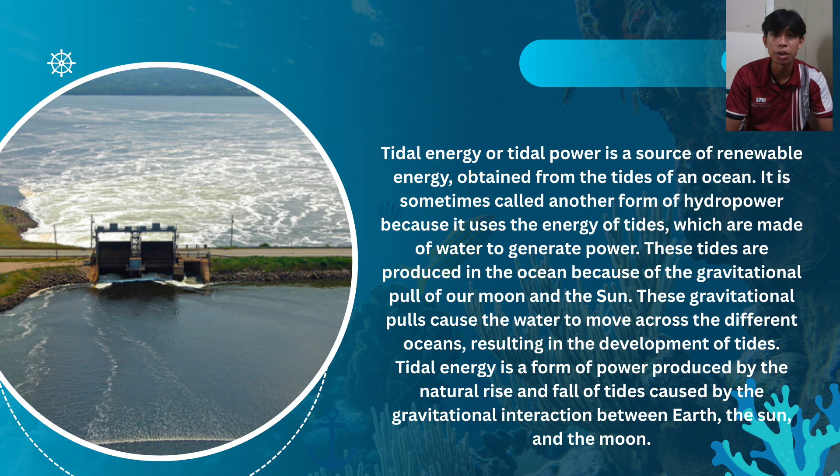to generate power. These tides are produced in the ocean because of the gravitational pull of the moon and the sun. These gravitational pulls cause the water to move across the different oceans, resulting in the development of tides. Tidal energy is a form of power produced by the natural rise and fall of the tides caused by the gravitational interaction between Earth and the Sun and the Moon.

Tidal range. The difference between high tide and low tide is called tidal range. High and low tides refers to the regular rise and fall of the ocean waters. High tide is when water covers much of the shore after rising to its highest level. Low tide is when the water moves back to its lowest level, moving away from the shore.

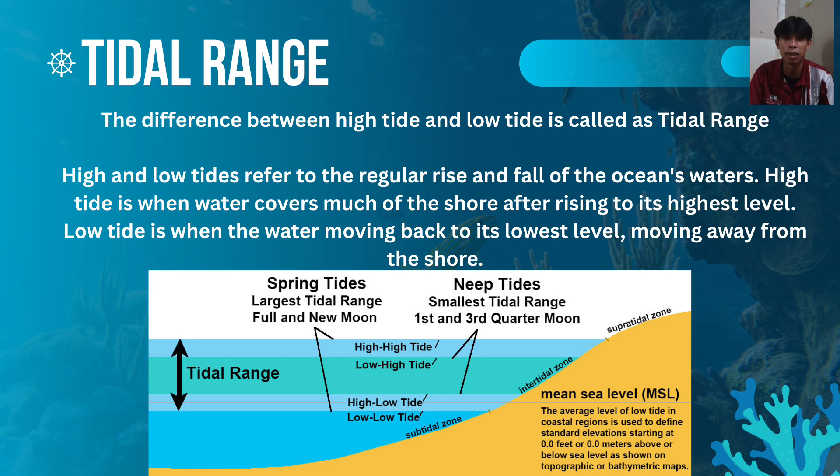For more explanation about spring tide and neap tide, it will be explained in the next slide. Basic principles of tidal power.

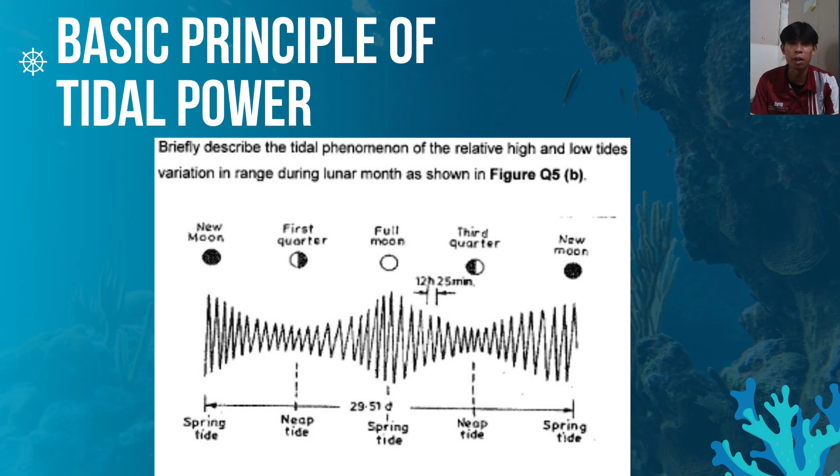Neap tide. A neap tide follows 7 days after a spring tide. Like spring tide, it's connected to the lunar phase and takes place after the first and third quarters of the moon. This is when the moon and the sun are at right angles to each other. The effect of this alignment is that there is less difference between high and low water.

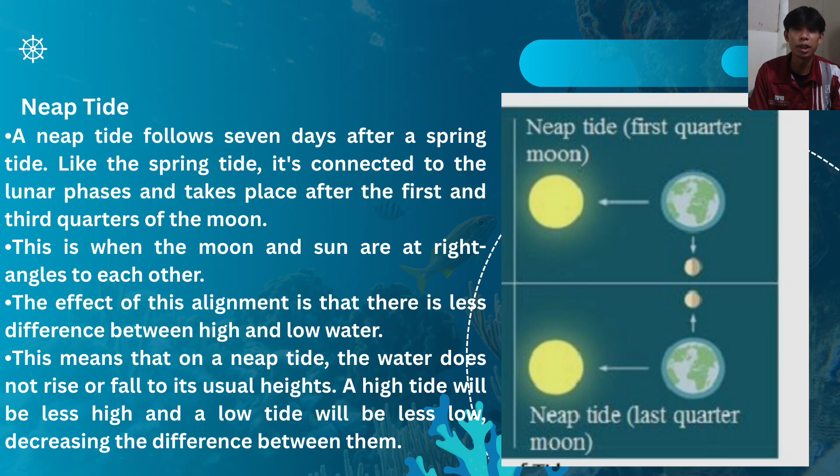This means that on the neap tide, the water does not rise or fall to the usual heights. A high tide will be less high and a low tide will be less low, decreasing the difference between them. Spring tide. During full or new moon, which occur when the earth, sun and moon are nearly in alignment, average tidal ranges are slightly larger.

This occurs twice each lunar month, about 29.5 days on average. The moon appears new, dark, when it is between the earth and the sun. The moon appears full when the earth is between the moon and the sun.

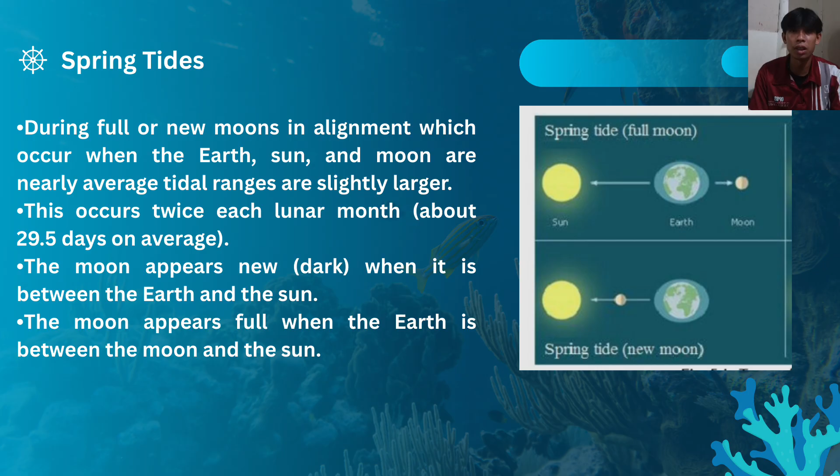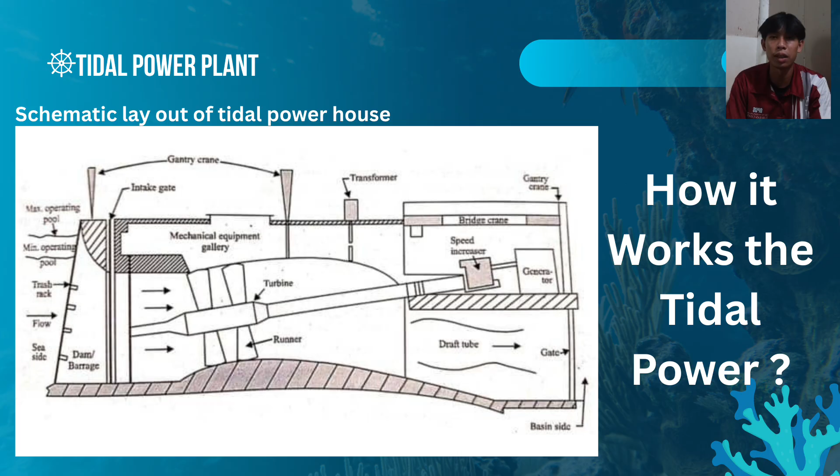Tidal power plant. This is the schematic layout of the tidal power plant. So, how does the tidal power plant work? We have some videos to show to explain how the tidal power plant works. So let's watch this.

How does tidal power work? Tidal power is energy made from the movement of ocean tides. As the moon's gravity pulls on the earth, it causes water to rise and fall. This rise and fall is called a tide. When water flows in and out, it carries kinetic energy.

Tidal power plants use this motion to spin underwater turbines. These turbines are like windmills beneath the sea. As they spin, they drive generators that produce electricity. There are two main types of tidal systems.

Tidal barrages are like underwater dams. They trap water at high tide and release it through turbines at low tide. Tidal stream generators are placed in fast-moving currents. They work like underwater wind farms.

Tidal power is predictable and renewable. It doesn't rely on the weather, but it can affect marine life and is expensive to build. Still, it's one of the cleanest ways to turn the ocean's rhythm into power.

Basic components of a tidal power plant. First is the dam or barrage, sluice gate, and tidal stream generator. Dam or barrage. A tidal barrage is a dam-like structure used to capture the energy from masses of water moving in and out of a bay due to a tidal force.

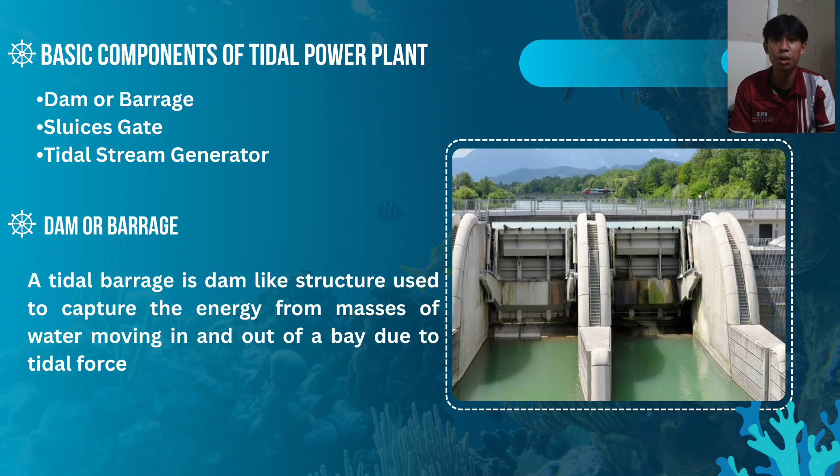Sluice gate. The sluice gates are left open during high tide and closed during low tide to create a water level differential, creating a potential difference that powers the turbine when the water is released.

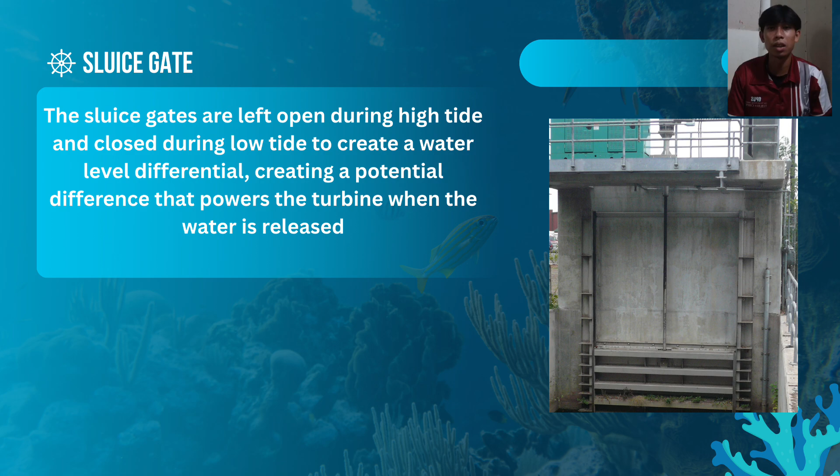Tidal stream generators are very similar to wind turbines, except they're below the water surface instead of above on land. The turbines and generators convert the movement of water coming from the change in tide, the kinetic energy, into electricity. Water is denser than air and therefore can generate electricity at a lower speed than wind turbines.

Tidal streams, flowing bodies of water that are created by the tides, can be used to produce electricity. For this, tidal stream turbines are used to convert the flow of the stream into electricity. These turbines are placed underwater and are fixed to the seabed for their support.

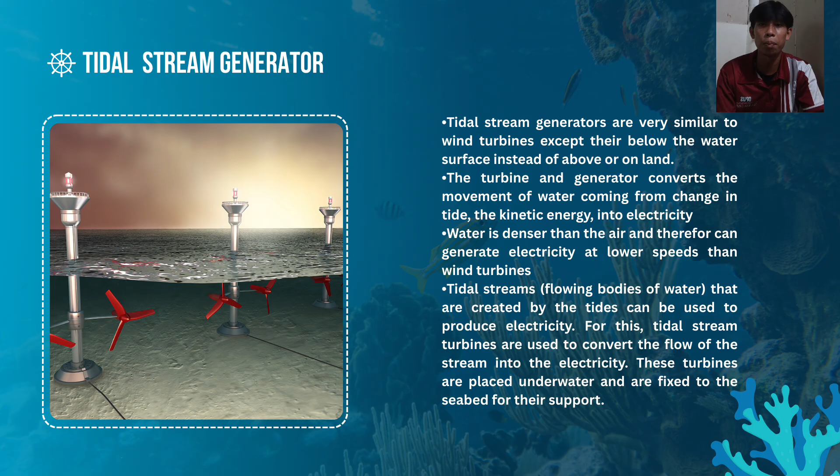Harnessing tidal energy. Tidal power plants are generally classified on the basis of the number of basins used for power generation. They are further subdivided as one-way or two-way systems as per the cycle of operation for power generation.

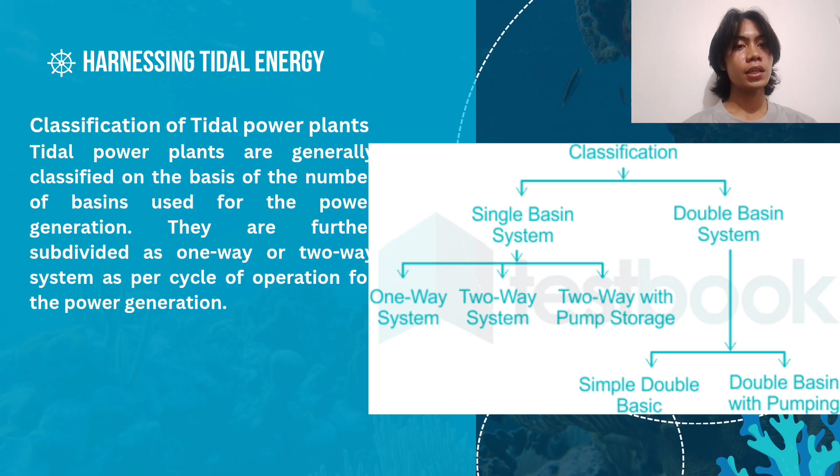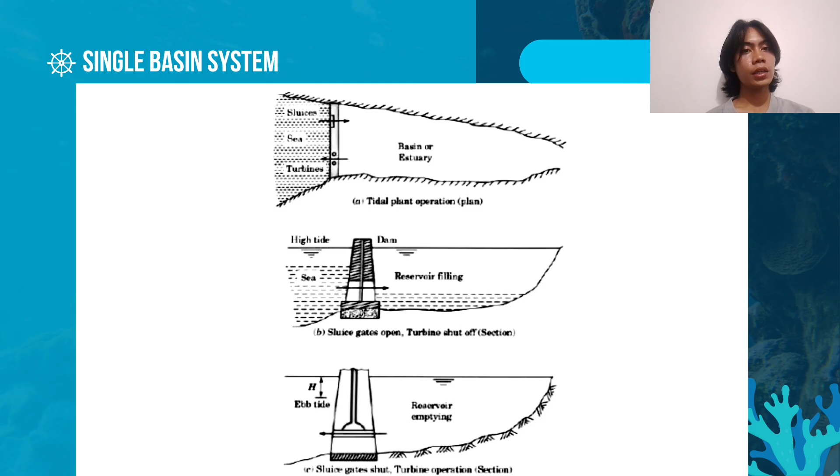Emptying. The trapped water is forced to flow out through the turbines, spinning them to generate electricity until the water levels equalize and the next tide cycle begins. When the flood tide, high tide, comes in, the sluice gates are opened to permit seawater to enter the basin or reservoir, while the turbine gates are shut. The reservoir thus starts filling while its level rises till the maximum tide level is reached.

At the beginning of the ebb tide, the sluice gates are closed. Then, the generation of power takes place when the sea is at ebb, the flowing back of the tide, and the water from the basin flows over the turbines into the lower level sea water.

After 2 or 3 hours, when there is a sufficient difference between the full reservoir level and the falling tide level to run the turbines, they are started and kept working until the rising level of the next flood tide and the falling reservoir level together reduce the effective head of the turbines to the extent where they can no longer work safely and efficiently. The turbines are then closed and the sluice gates open again to repeat the cycle of operation.

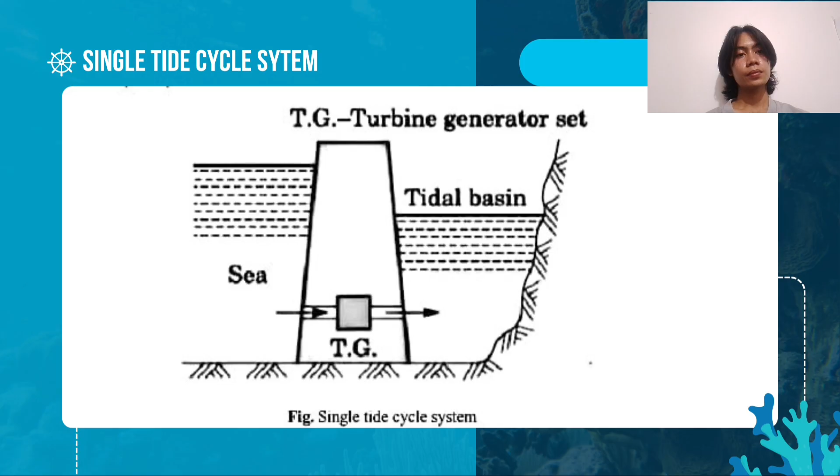During the ebb tide or low tide, the water is typically released back into the sea without generating power, or vice versa if it were an ebb cycle system, to reset the basin level for the next high tide. In the single tide cycle system, the power generation is effected when the sea is at flood tide. The sea water is admitted into the basin over the turbines, which causes the power generation.

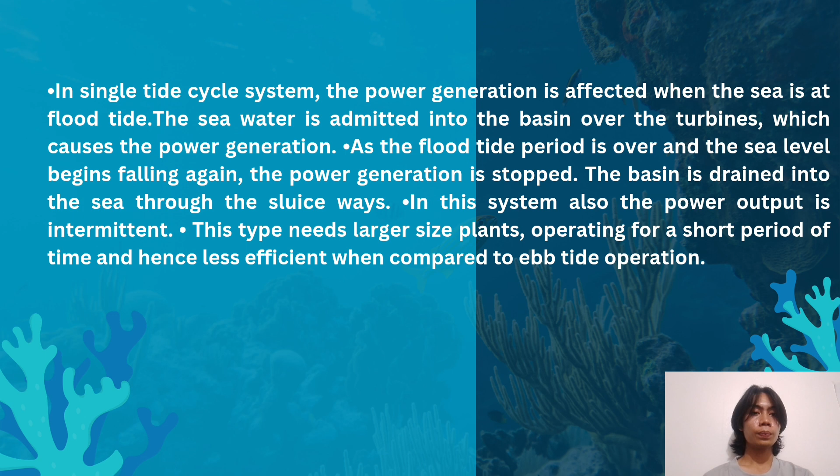As the flood tide period is over and the sea level begins falling again, the power generation is stopped. The basin is drained into the sea through the sluiceways. In this system, also, the power output is intermittent. This type needs large-sized plants operating for a short period of time and hence is less efficient when compared to ebb tide operation.

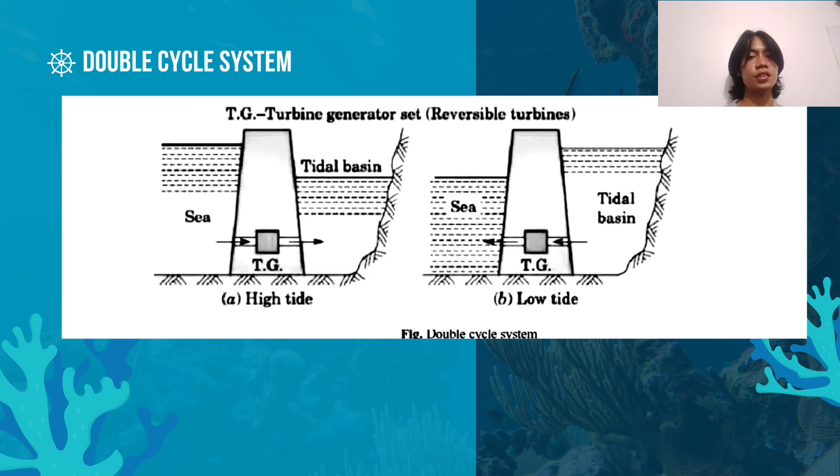The single basin system has only one basin. The tidal basin and the sea are separated by a dam or barrage. The rise and fall of tidal water levels provide a potential. Fig shows a general arrangement of a single basin tidal power plant.

Double cycle system: such plants generally use reversible water turbines so that power is generated on low tide as well as high tide. In the double cycle system, reversible turbines are installed and power is generated during filling and emptying of the basin. Filling occurs when the ocean is at high tide while the water in the basin is at low tide level, and emptying occurs when the ocean is at low tide and the basin at high tide level.

The flow of water in both directions is used to drive the reversible turbines. Each turbine drives the generator. Electric power is generated during two short periods during its tidal period of 12 hours and 25 minutes, or once every 6 hours and 12.5 minutes.

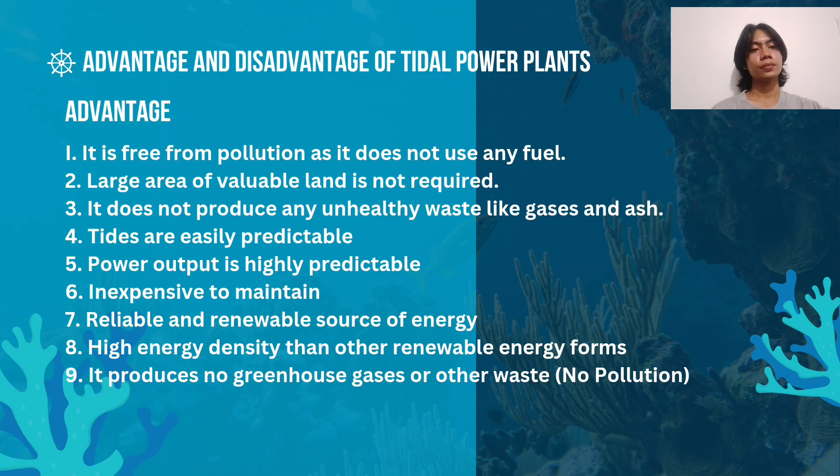Disadvantages: due to variation in tidal range, the output is not uniform. There is a fear of machinery being corroded due to the corrosive seawater. It is difficult to carry out construction in the sea. The power transmission cost is high because tidal plants are located away from load centers. Initial construction cost is very high.

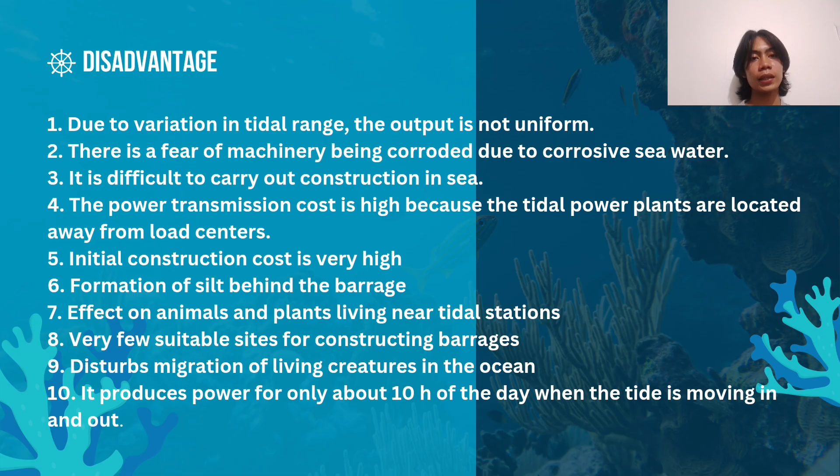Formation of silt behind the barrage. Effect on animals and plants living near the tidal station. Very few suitable sites for constructing a barrage. Disturbs migration of living creatures in the ocean. It produces power for only about 10 hours of the day, when the tide is moving in or out.

Limitations of tidal power. It is site specific, and tidal energy can be recovered economically only from locations where the tidal range is 5 meters or more. The availability of tidal energy is variable, thus power generation is highly fluctuating in nature. Turbines are needed which can operate with fluctuating heads.

The marine life and ecology are affected in the region where the tidal plants are located. It also affects the navigation system. In order to handle large volume flow rates of tidal water at low head, tidal plants need to operate with several turbines in parallel. Seawater is corrosive.